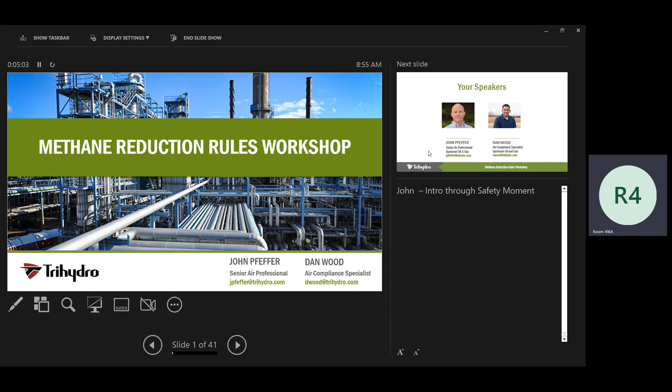Thanks. As Randy mentioned, my name's John Pfeffer. Long, extremely long bio; I usually abbreviate it. I've been primarily doing EH&S work in the downstream world for close to 30 years, but jumping into the upstream world the last half a decade and working with Trihydro, learning a bit from guys like Dan who spent a lot of time in the field. Dan's going to do most of the presenting today, and the experience Dan brings ties directly into what everybody's all excited about, which is new and upcoming regulatory changes. We're all collectively scratching our heads on a bit, but don't shoot the messenger. It's not his fault. That's right. So I'm going to give a little bit of a background.

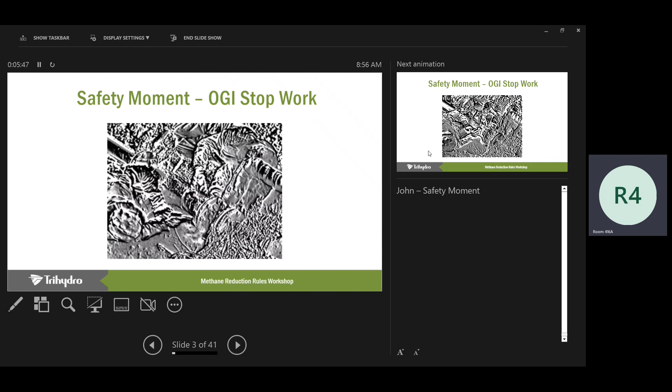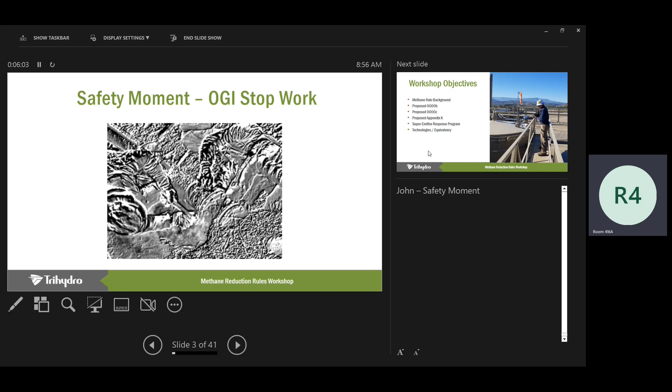We start with a safety moment. I forgot that. So I'd like to do a quick little safety moment. If any of you were in our presentation yesterday, you got to see this too. Dan actually shot this video, I believe, or it was one of our cohorts. How do I restart that? There we go. A couple of folks working down in the hole, making a flange repair, but getting a snoot full of gas. You can tell once the camera's turned on the scene. You don't always see exactly what those hidden hazards are. Good example.

Waiting for you if you're not paying attention, and a good example of a safety, health and safety aspect of an OGI camera. We were there to do fugitive or OGI camera surveys, but found a safety issue and called it to their attention and stopped the work. This was a good example of that.

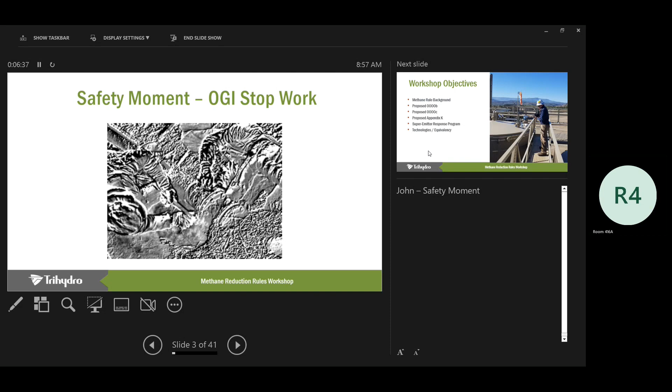The objectives for today: I mentioned we're going to talk about these new rules that have been proposed. I'll start with a little bit of background. I'll tee it up with a couple of slides on that, and then let Dan jump into the details of the new proposed regulations and where we think those may be going, and the things that we see as key points, but also questions that are still to be answered.

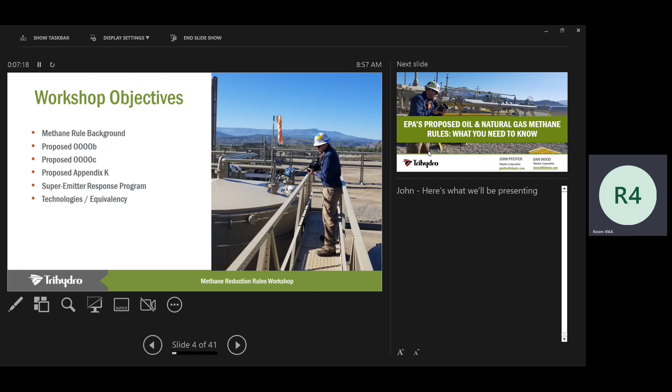I think there's still a little bit of work to be done with the final rulemaking, and we're, as with everybody, trying to determine the best course of action to understand what might be coming. Help our clients, but help the regulated industry understand what's awaiting us out there. Background on the rules. I was going to talk just briefly about the Quad O series. Of course, we rehash this a lot, but

the Quad O, we put the effective dates in here just for reference and thinking a little bit more about what might happen with the new proposed Quad OOOOb and what that effective date is. It's supposed to be a certain date, but whether it will be that date or not, there's some debate over that. Reminding us collectively too that Quad OOOOa was the first reg to bring the concept of methane into these rules. It carries forward in Quad OOOOb and Quad OOOOc, but

I guess the point we're trying to make on this effective date is, historically, traditionally under rulemaking, we would see what's referred to as an advance notice of proposed rulemaking, and that's what we effectively saw in the original publication, which was more of the concept phase in 2021, the collection of comments around the ideas that were posed at the time. So we saw rule language come out in 2022 for the first time.

Typically, you would have to have actually proposed rule language for that to become the effective date. The NSPS is based off of the publication date of the proposed rule, but typically relies on rule language. There was significant change in the rule language that was published in 2022 versus 2021. So the question is, will 11/15 of 2021 be the effective date for the majority of the rule?

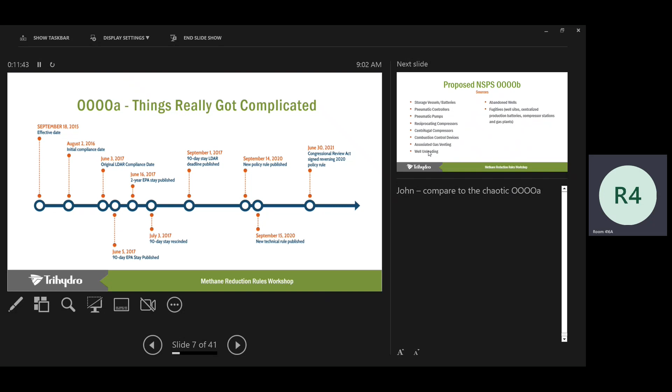Good question. Yeah, you bet. Quad OOOOc applies to existing infrastructure, kind of brownfield assets, to use that language. Quad OB applies to greenfield moving forward, if I got that right? Yeah. Let me back up and see if I've got it noted. The triggers for the NSPS is what we're talking about. So yes, that's exactly right.

If you use the term brownfield or existing, there's sources that have not been constructed in these date ranges or, since these date ranges were for the effective rule, modified or reconstructed. And those are defined in the regulation. So yes, you can have an existing facility that gets modified or reconstructed that will trigger the current rule in effect at that time.

So then you are thinking of Quad OB correctly, that coming forward, it will affect sources that are constructed, modified or reconstructed after this date today as proposed, but it might be a 2022 date. So not non-modified, not brownfield assets where nothing has changed. Yeah, correct. If you don't modify the source, Quad OC will bring those in. That's the concept. The intent is it's going to capture the existing sources that don't already have applicability because they were not constructed, modified, or reconstructed in this window.

Probably asset owners will want to apply a consistent high bar across. I think some people will for lots of reasons. Sometimes it's simplification. Sometimes it's just culture. They have a value. They want to bring things to as high a level as possible, or to be as compliant as possible, or to be reducing emissions as much as possible. Sorry for the diversion. No, that's good. That's what we want, actually.

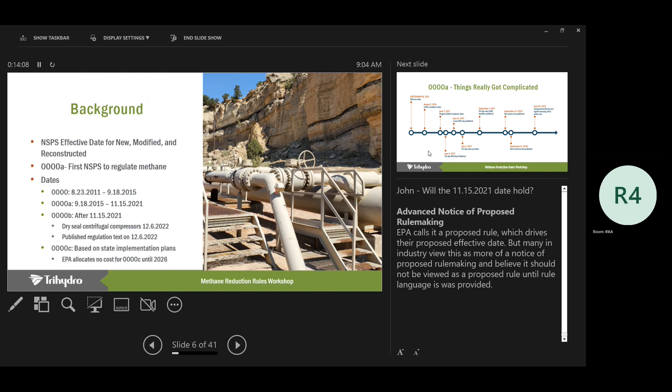Okay. So I'm going to show these are the proposed sources, and Dan, the next series of slides will speak to each of these in detail: what's in the rule and the things that we teased out that we wanted to point out associated with each of these. But this slide is really just for illustration of the different categories of sources that are affected by this rule. The next slide goes into it, so I'll pitch it to Dan Wood.

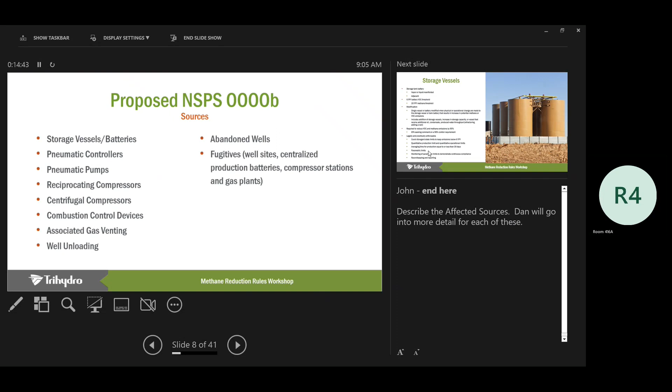All right, you guys ready for this? Like John said, we're going to go through each one of these source types. The first one I'm going to start off with is storage vessels. Historically, for those of you that have dealt with it, you've dealt with the 6 tons per year, right? So you could add storage vessels and end up finding ways of getting underneath the 6 tons per year. There's lots of ways, even through the state's legally and practically enforceable piece, that allow you to stay under the 6 tons per year.

No longer. With Quad OB, if they're vapor or liquid manifolded, or adjacent, you're talking about the 6 tons per year for the entire battery. So now you're aggregating all of your tanks. That's a big change, right? That's going to pull in pretty much every tank system that I'm familiar with. And we'll talk about it briefly, but one of the challenges there is going to be like dry gas.

You know, if you have a gas field and you just have a water tank out there, that's a challenge, right? Now, you very well could be technically over 6 tons per year for a single tank sitting out there, but not have enough combustible vapor to even combust, or to install even a VRU. A lot of times there's a lot of oxygen on those, so you can't install a VRU or even be able to combust your gas with some sort of combustor.

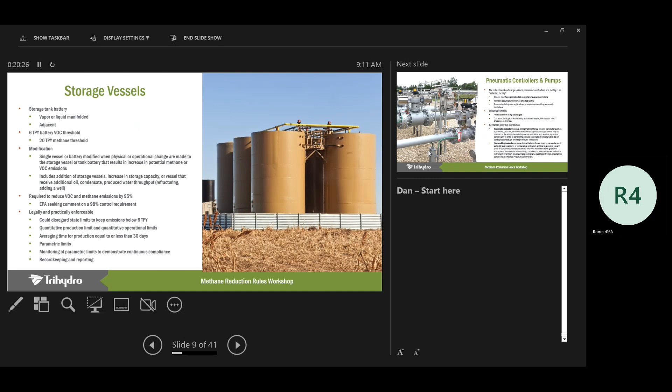For me, this is actually one of the ones that's really scary. This is one of those things that's going to be quite costly. Ultimately, we've seen this in a few places, Colorado and New Mexico. New Mexico is a precursor, but ultimately, all gas-driven pneumatic controllers are going to have zero emissions, so it requires zero emitting pneumatic controllers. So no gas venting. Where in a lot of places we're allowed to use low bleed under that 6 SCFH, we're no longer going to be able to do that anymore. They all have to be zero.

So what does that mean? Could it be instrument air? Sure. You route that gas back into the process? Sure. I saw Kimray came out with that. There are some retrofit kits that you can use, and it actually goes full loop on the pneumatic. There is some more technology out there. Those retrofit kits are only about $20. So those are for back pressure valves. For back pressure valves, which is questionable.

It is subject to debate, and that's part of the reason I included this. This NMAC, the New Mexico rule - there aren't very many good definitions of pneumatic out there for exactly what you're talking about. That's actually one of the best definitions I've seen. And there's also a non-emitting controller.

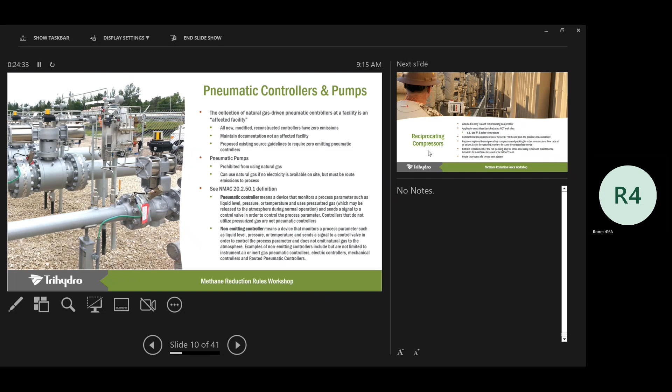Every 8,760 hours - so not dead on one year, but you have to do it within a year - and at or below 2 SCFM, so that's about 120 SCFH. In my experience, with the thousands of compressors I've measured, probably 40 or so percent of them are usually over that. That's a big deal, it really is a big deal. You can replace right back.

Ultimately, they're saying BSER is replacement of the packing or any other necessary repair and maintenance activity. Initially, in the first version we got, they essentially said replacement of packing, and now there's a little bit more leeway with other necessary repairs.

A key point here is there's a big difference between compressors - they don't talk about how many throws a compressor has. Is it a compressor with one throw or one with eight? Because I've seen both, but you're still going to be required to comply. It's multiple wellhead compressors versus these little ones - if it's just at the wellhead by itself at a small production site, you're good to go. If you get into centralized tank batteries, the larger facilities, compressor stations - that's where you get the full requirement.

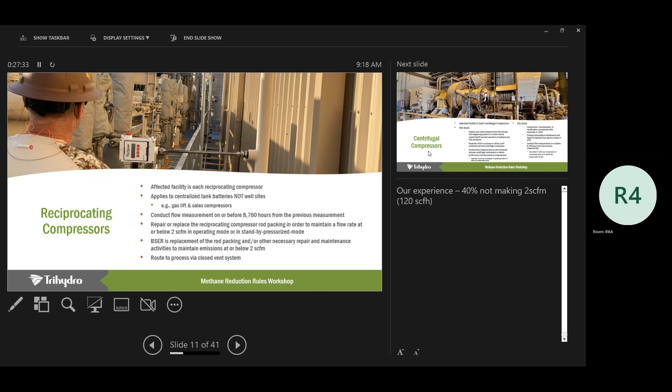Centrifugal compressors have very similar requirements. One thing that changed from the first version to now: they originally said it had to be a closed vent system under negative pressure that you routed it to. That's no longer the case - you can just route it to a closed vent system. So especially for smaller facilities and applications that don't have a negative pressure type flare system, you can actually still route it to a combustor and that will be okay.

A key note they added is it's got to be measured in operating mode, but they also allow for standby pressurized mode. Now, some of these turbines are either operating or they're depressurized when shut down, so sometimes the standby pressurized mode may not be an option, but you can use either mode. If one is under and the other's not, you might have a good idea of which one to use - it varies a lot. I've seen where the standby mode ends up being actually quite a bit worse than the operating mode. Once that oil heats up and all of that, it does a lot better job.

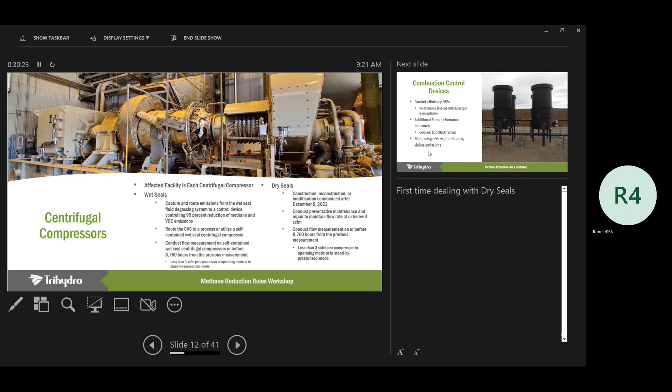Combustion control devices are very similar to what we were talking about before. Control efficiency at 95% - we initially commented on a 98% rate, but right now it is written as 95. Performance tests based on the manufacturer test are acceptable, and then there are some requirements potentially for additional flare performance measures.

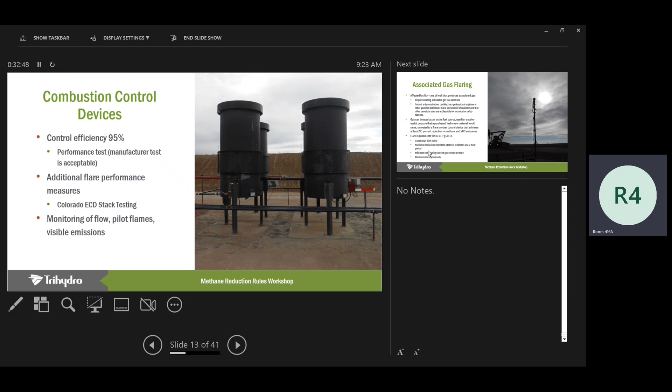Associated gas flaring - basically, you can't do it. That's really what it comes down to. It requires routing of all your associated gas to a sales line, or you submit a demonstration signed by a certified professional engineer - they do allow other qualified individuals - showing that a sales line is unavailable or that other beneficial uses are not feasible for technical or safety reasons. One of the ways I've seen some companies deal with this, in states that are restricting flaring...

Things like running generators out on site, mining Bitcoin - these types of things. It's kind of unique; I've been seeing a lot more of it as a way to essentially still use the gas, since they don't have a pipeline nearby or can't get the midstream operator willing to connect in. That's their way of trying to deal with it.

Now, not to pick on anyone - but like in the Front Range, where you're dealing with serious non-attainment status, now you're dealing with a scenario where you can't even do that, right? You put a generator on site, you're going to be dealing with a very different permit.

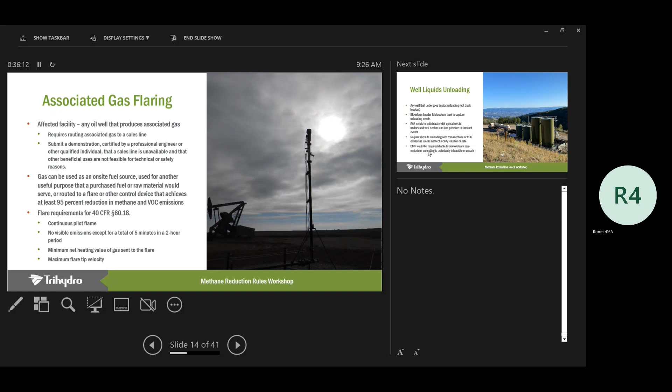Okay, well liquids unloading. For those of you that aren't familiar with well liquids unloading, it applies to gas wells here, and we're not talking truck loadouts. We're talking about when you get enough condensate and water downhole and gas actually slows down your gas production.

Essentially, in a lot of cases, operators would take that gas and route it straight into a tank system. Sometimes it's controlled, sometimes it's not. A lot of times it's just water - you're unloading water out of the well, and as soon as you get gas, you shut it off. It's usually very temporary, not a long-term thing.

But ultimately, you're not allowed to vent that gas. It has to be controlled - you might route it into a tank just to clear the liquids out, but a lot of these tank systems would just basically vent the gas. So that's not going to be allowed anymore.

Anybody in here deal with this? Yeah, we do it a lot. I guess I'm just kind of curious, but... So, I mean, we're talking like a remote single well gas well.

Highly loaded with water - I've seen basically a blow down header device on a trailer. The way they have it set up, there's one I saw that had a mobile flare on it, and another one you could actually hook in. It's an interesting thing because some of the liquids unloading situations are understandably different.

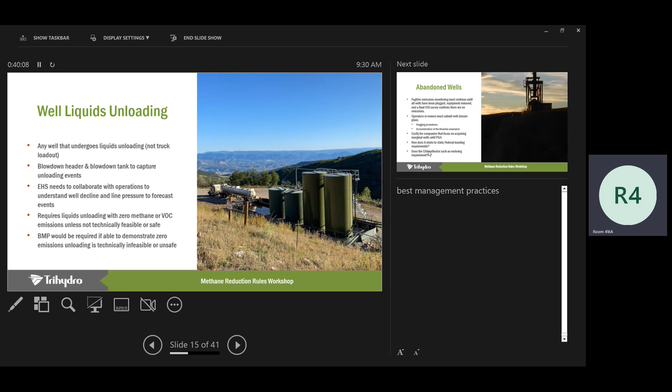All right, abandoned wells - this is another kind of contentious point. Ultimately, you're going to be required to do fugitive emissions monitoring until wells have been plugged, equipment removed, and a final OGI survey has been done.

So this is one of those things you have to have a plan in place for. As part of this as well, you have to submit well closure plans, including your plugging procedures, documentation of financial assurance, and some questions that I've ended up getting from companies.

It's going to be costly for some of these companies whose entire focus is marginal wells, talking about less than 10 barrels. This can be pretty cost prohibitive. How does that actually end up relating to existing state and federal bonding requirements? Getting into some of the BLM stuff as well, does the Clean Air Act even authorize a requirement like this that basically goes from the start when you drill the well to something that could be decades away, requiring a lot of guarantees as a company that you're going to take care of this.

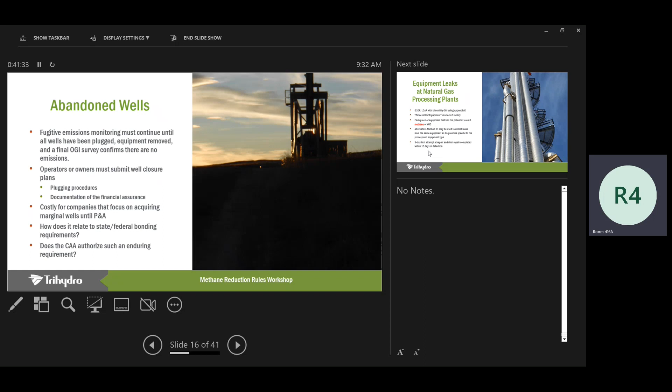All right, equipment leaks at natural gas processing plants. So we've got a couple of processing side topics.

Essentially, we're talking about Appendix K using OGI. Where it used to be that the BSER would have been Method 21 from previous programs, we're now talking about using a camera, but it has to be using Appendix K. Of course, process unit equipment is affected facility, so process unit boundaries, there's not really any difference there from what we've seen in the past. But the big difference here is methane.

So it's not just 10% VOC. As a matter of fact, I didn't see a reference in there to 10% VOC, but it just said VOC. So really any concentration of VOC or methane - it's pretty much everything in the plant. Now all of that equipment, like your fuel gas systems, regen gas systems, all your residue gas - you're talking about not just some smaller process type things, but really large process units that can qualify as process units that are now going to be pulled in.

You still can use Method 21, but keep in mind, when EPA addresses something as the BSER, their intent is that they really want you following whatever that is. So in this case, if you go from Quad O to Quad OB, you really should be using OGI.

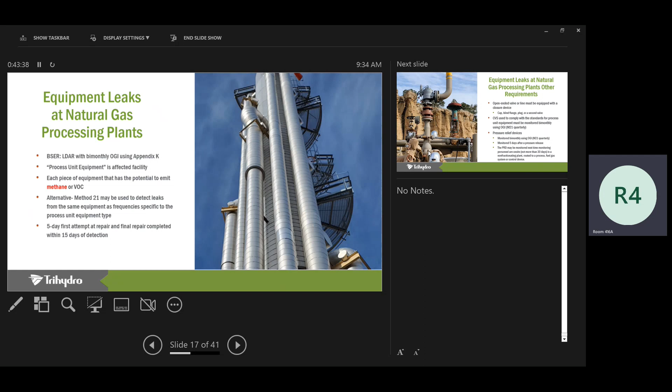For other requirements, a lot of us are used to the open-ended valve or line - you're required to have the cap, blind flange, plug, or second valve. That is a part of the rule. You can use closed vent systems to comply with some of the process.

Your closed vent systems are going to be required to be monitored bi-monthly using OGI, or Method 21 quarterly. So that is kind of an increase from our annual NPE type inspections. Pressure relief devices are also monitored bi-monthly, and they need to be monitored 5 days after a pressure release.

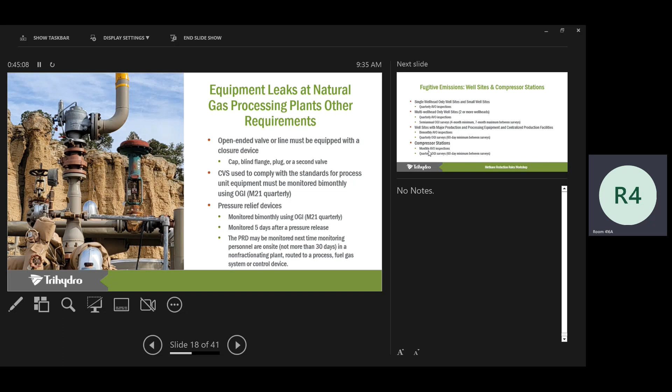One caveat that they added in, which as somebody that used to do a little bit of Method 21 I really like, is this: it can be monitored the next time monitoring personnel are on site within 30 days. In general, when we go back out and monitor a PSV after it's been repaired - once a company repairs it, it is extremely rare that we end up catching it leaking again. So from a cost standpoint, rather than having to send somebody out right away over a weekend or a holiday, you've got 30 days now. And chances are, if you have personnel out there monthly, they're going to make it out on site.

Getting into well sites and compressor stations - so single wellhead, there's basically 4 categories here. You have single wellhead only and small well sites. Small well sites basically can be a small wellhead, a tank, or basically one small piece of equipment. Those basically just require quarterly AVO inspections.

Once you get into multi-wellhead only sites, you have quarterly AVO, semi-annual OGI. So we're used to the 4-month minimum, 7-month maximum - it's no different here, so you have that 3-month time window survey done.

Then well sites with major production and processing equipment, and your central tank batteries - you're talking about bi-monthly AVO and quarterly OGI surveys. Similar to the compressor stations that we have now under Quad Oa that are quarterly, 60-day minimum - it's the same thing for well sites with processing equipment. You have tanks, treaters - you're now a well site with major production and processing equipment.

And then compressor stations, monthly AVOs and quarterly OGI surveys. So both well sites with major production - the larger well sites, tank batteries - and compressor stations will now be quarterly.

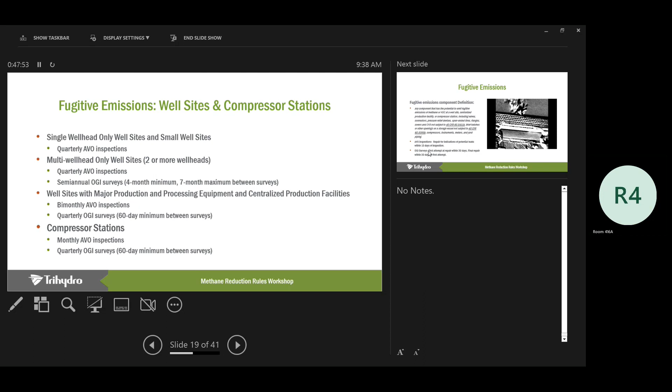Not going to read the definition, but there actually is another definition for fugitive emission component. Now, keep in mind that these hatches or other openings on a storage vessel, essentially, if it's a controlled storage vessel, it is a fugitive, including at gas plants. So where historically we haven't really had to deal with covers, hatch seals, some of those types of things, this is under the federal. Those are pulled in.

And then, of course, for compressor stations and well sites, for AVO inspections, if you find something, you have 15 days to make a repair. And for OGI surveys, you have the first attempt in 30 days and 30 days final repair.

So they do still allow for soap bubbles for verification. I know that's been a really big thing. Everybody can immediately confirm something's repaired. Obviously, in the case of like thief hatches, there are times that you can't use soap bubbles, so you need to be cognizant of that. I know in Quad OOOOa, they specifically called out not using soap bubbles for confirmation of leak repair, but it's just something to keep in mind.

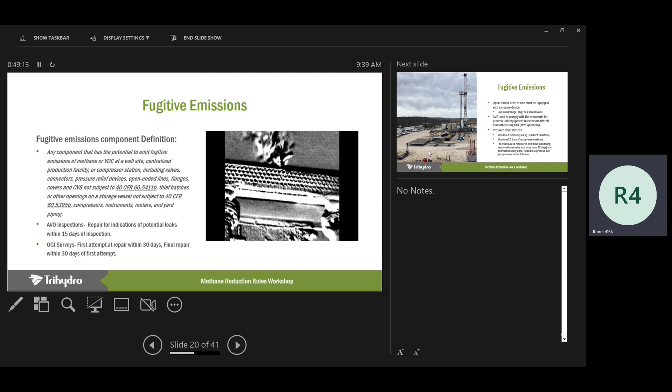Is it something where you can just simply go back, look at your records and find out somebody blew something down? Oh yeah, it was definitely that. Or is this a scenario where you need to send an OGI camera out on site, do an entire survey to confirm that there's no emissions out there? Right now, there's not really a whole lot of guidance there.

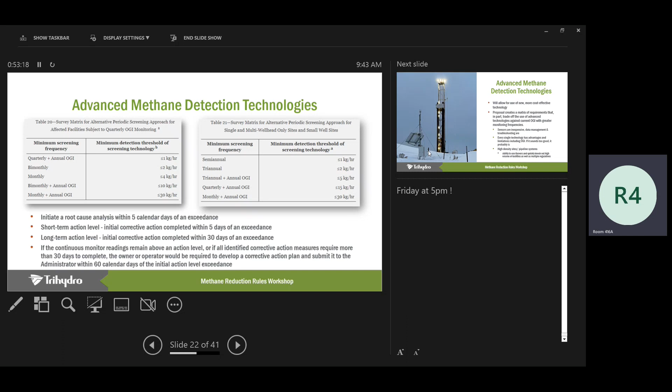But if you have to go back out with an OGI camera every time, now if you're out there monthly with an OGI camera anyway, why did you install a continuous system? So I'm hoping we can work through some of those things, but being able to use some of these technologies in an effective way, it is actually less costly. Better, because with an OGI camera, you watch the film. Right, exactly.

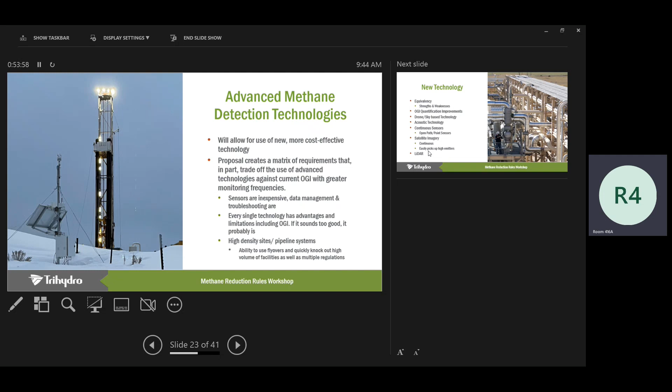So basically, this is just what I was talking about. It will allow for new, more cost-effective technologies. I'm thinking about things like the drones. When you start getting into high-density sites, pipeline systems, those types of things, that's really where that technology shines. If you've got well sites spread out by 20, 30, 50 miles, maybe not the best technology for you, but recognizing that every technology has options.

But let's be honest, if somebody tells you that their technology is the best and it has no weaknesses, they're probably lying to you. But make sure that you're matching the technology that you're looking at. And we're here partially for technology, right? We want to learn, we want to know about it, we want to see what's out there. And there's a lot out there now, from acoustics, OGI quantification, drone, satellite, continuous stuff, you name it. But understand what's your pain point, your goal?

What are you doing? I would add, if any one technology tells you it's a one-stop shop for everything you need, they're wrong. It's not an either-or, it's an and scenario, and it's for the asset owner to understand their objectives and then which combination of technologies can keep me compliant in the most efficient way. They're all just pieces in the puzzle.

And then of course, where does the data end up? Is that data going to be raw data files put out to the public, something that you're using internally, or just records to the agency? What does that look like? Because if somebody gets a hold of that data that doesn't know what they're looking at, what it actually means, sometimes it may not actually be a violation, a leak or something like that. It could be a permitted thing that's going on on site.

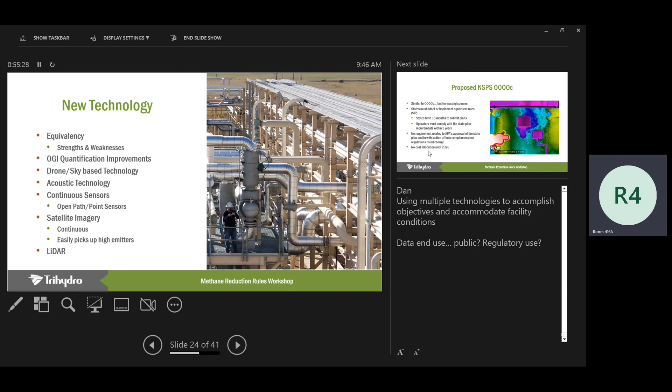And honestly, I'm not gonna spend a whole lot of time on Quad OC, because ultimately, until we actually see what the states are able to roll out, we don't exactly know. So right now, they're saying that it has to go through the state implementation plan process. EPA is giving states 18 months, and then operators must comply with the state plan once approved in 3 years.

I was actually talking with a gentleman from a state where they actually requested 3 years to develop their state implementation plan. It sounded like a few other states commented on that as well, just because it was kind of starting from scratch. Yeah. And also, industry just needs time, especially for existing sources, to even be able to deal with it. Our focus is trying to get EPA to allow for more flexibility on demonstration.

As Colorado, as you hear, it feels like our Reg 7 is like it, but better in a lot of ways, although it doesn't have all of it. So our struggle is with EPA on saying we don't have to demonstrate equivalent pneumatics to pneumatics and tanks to tanks. Like, our program as a whole is equivalent. Well, I know. I wish it were easier, but that's our approach. We think ours is better.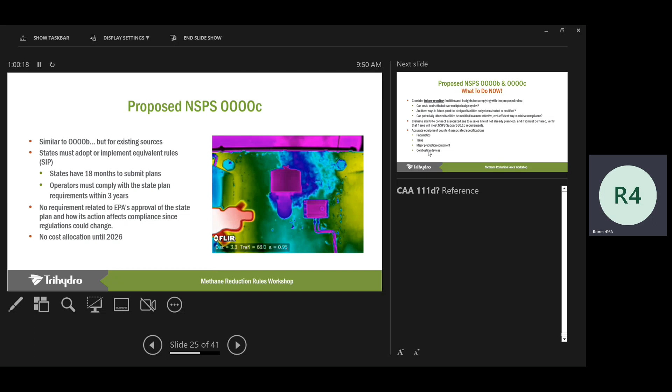There are a lot of different things being developed, especially on the pneumatic side, to deal with this instead of setting a generator with an air compressor at your site. On an association call, folks up in the Jonah Field dealing with ozone issues said for larger sites they'd love to set a gen set out there and run instrument air. Well, you're in a non-attainment area, so that's not really an option. You already deal with ozone action days where they try to prevent combustion. So beyond the rule, you might have to find even further alternatives.

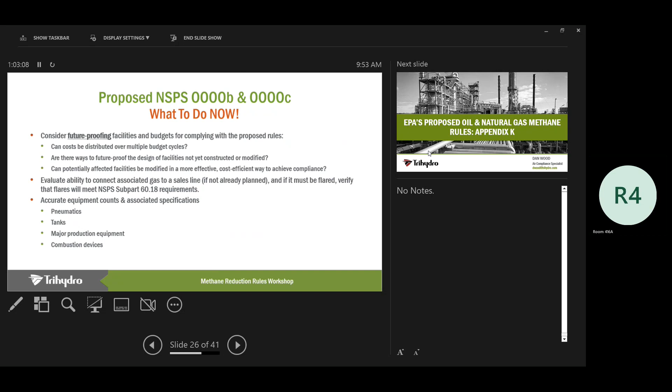How many of you guys have read the new version of Appendix K? I haven't since it changed. I remember last year at this time. Not a whole lot different, even with all the feedback they got. Not a whole lot different in that one of those meetings we talked about.

Of course, one change we got was it's not looking like it's going to apply to compressor stations. So generally safe from that side, because it was going to be a really difficult thing for that quantity of sites. Even talking to the state regulators that are going to be dealing with this, if you're doing a camera inspection, even from a regulator side, if you need to be Appendix K trained, all of a sudden that's going to be really difficult for everyone.

But one interesting spot that I really like to point out for those of you on the transmission compression side. You have a transmission compressor station, and the new Subpart W proposal references all of your OGI surveys being conducted pursuant to Appendix K. So everything you're doing at a gas plant, you'll also do OGI surveys at transmission compression stations. And so technically there actually is a weird overlap there, that you could be required to do an Appendix K based survey at a transmission compressor station, even though in general for Quad O and a lot of these other regulations it doesn't apply.

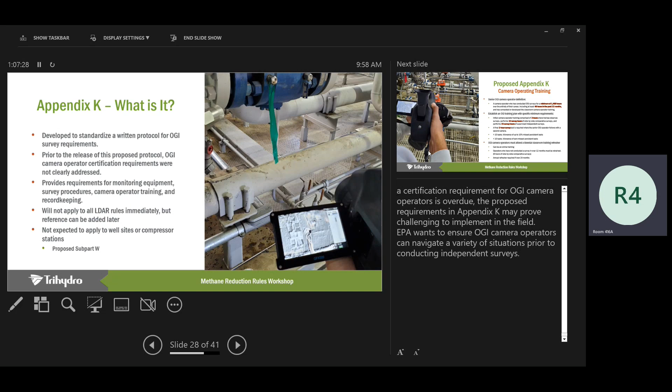So one of the big changes is under the camera operator training. Those of you that read the initial version, it was based on site surveys. And that was one of my biggest gripes, because there's a big difference between a well site and a gas plant or refinery. What is a site survey? They never even defined what a site survey is. So what does that mean? And so I was really happy to see that they switched to hours.

That being said, a senior OGI operator needs a minimum of 1,400 hours on the camera. And then you have to keep up every 12 months, making sure you have 40 hours. Shouldn't be too hard, but think about it, at least if you're having to do, and we'll get into the audits, if you're doing that stuff, you're kind of fulfilling that requirement just based on that.

But every single camera operator is going to need, I believe it ends up a total of 32 hours, if I remember correctly, where you have different pieces: the trainee observes, side-by-side comparative surveys with a senior OGI operator, and then 15 hours of supervised independent surveys. And then at the very end of it, there's this 2-hour survey test.

Something that they had in the first version was any persistent leaks: if you missed any, you had to redo part of the training and then take your test over again. Now they at least have this allowance, if you find greater than 10 leaks, that you can miss up to 10%. At some smaller facilities, sometimes you don't find 10 leaks, but at least there is a little bit of an allowance there.

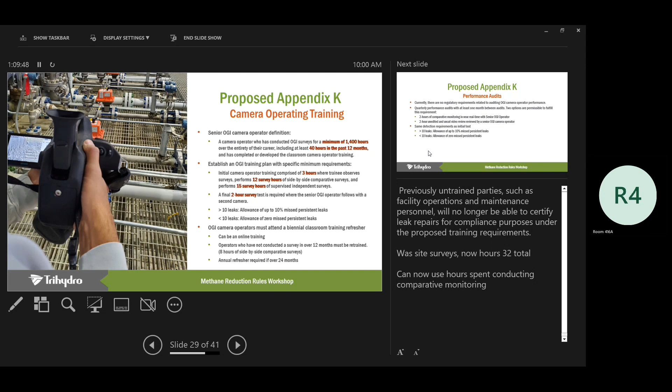Performance audits, essentially 2 hours comparative monitoring. This was 4 hours, so again a place where they made it less restrictive, but the concept is still there. So that can be real time with the senior OGI operator, or it can also be raw uncut video. You can actually submit 2 hours of raw uncut video.

I don't know if anybody here would qualify as a senior OGI operator. Quite frankly, I think the people you want out in the field doing these surveys are your senior OGI operators. They're the most qualified to find leaks and things in the field. I think we're going to see, as a result of these performance audits and requirements, that their entire focus is going to be training other people instead of actually being out in the field detecting leaks and doing what they really should be doing.

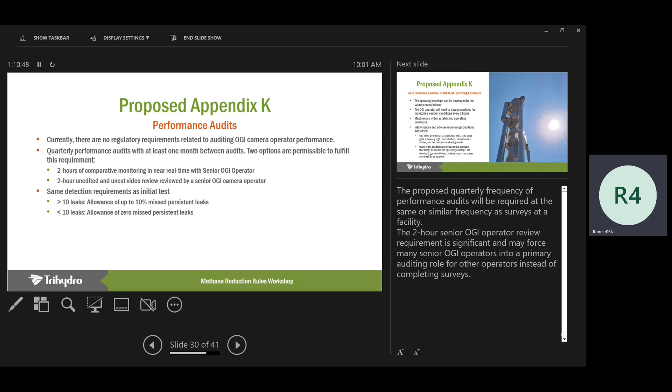Field conditions. One change they made here was they're actually going to allow the camera manufacturer to set the camera operating envelope, which was a big concern of mine. If you read through, there are a lot of requirements on how to set up this operating envelope and how you stay in it. At this point, at least one camera manufacturer, talking a little bit to FLIR, said their intention is to figure out independently what the camera can see based on wind, temperature, and even phase precipitation.

I think they're trying to wrap their heads around what it even looks like. But at least we can get to a point where you can go out on site and say it's 50 degrees, wind is 10 miles an hour, so I can see a distance of X, and use that instead of developing an envelope on site with 4 of your people. There's a lot of requirements there.

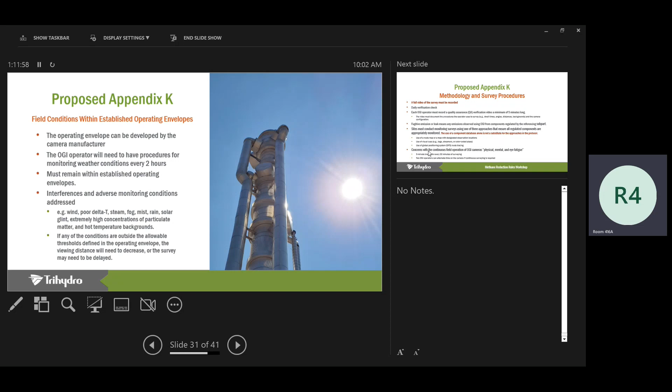Methodology and survey procedures. This is the piece that really scares me. Full video of the survey must be recorded. That's a change, that's a big change, that's an expensive change, that's a major data nightmare. I'm not even sure how we're going to keep up with the amount of video footage. We're talking terabytes of video footage per company, from our standpoint, where you're already required to do a QA video 5 minutes long, daily instrument checks. You've got all of these other videos you're already required to do, plus your entire survey video as well.

Another piece of this is the monitoring surveys. There are 3 approaches you can use. They specifically call out, for example, gas plants where you already have a component database in place, tagged all your equipment - it's not a substitute for any of these 3 approaches. So getting into use of a route map, designated observation locations, use of visual cues, or GPS route tracing. I thought it was kind of unique.

I'm curious to see what FLIR comes out with. I know the Champion X camera I saw out there actually has some really good GPS capability built into the camera - it's real accurate. The old FLIR cameras and the Opgal camera I've seen, the GPS can be off by a quarter sometimes and all over the place. So it's going to be really hard to demonstrate that you're covering everything you're supposed to.

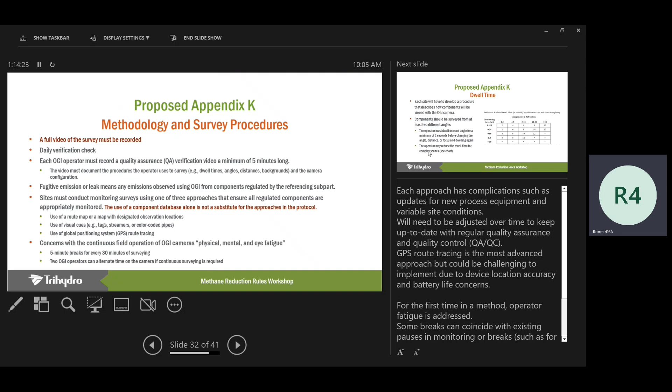Well timed - EPA did release this chart. It actually looks a little bit different; the numbers are slightly less than what they were, but similar cross sections. In general, they require every single component to be monitored for 2 seconds at two angles.

So this is one of those things I'd be curious if anybody has any feedback here. As somebody that does get out in the field sometimes and use the camera, how in the world do you pick an area? So maintain distance, measure cross, you're guessing, right? How do you prove that cross section is the area that you're talking about here?

Not only that, count the number of components to know that you're doing it correctly. I'm not sure how you even use this table necessarily in a way that you can effectively always tell somebody I comply with this table. Because if you've got 8 components but you were 0.125 square meters, doing that continuously over the course of the day, I really don't know how you do that. How are they gonna audit it?

I think that's good, it's gonna be hard to audit, but some of the full videos of the surveys, they might be able to see some of it. As we went through Appendix K, it became apparent to our team that some of this is written by people who never even... definitely.

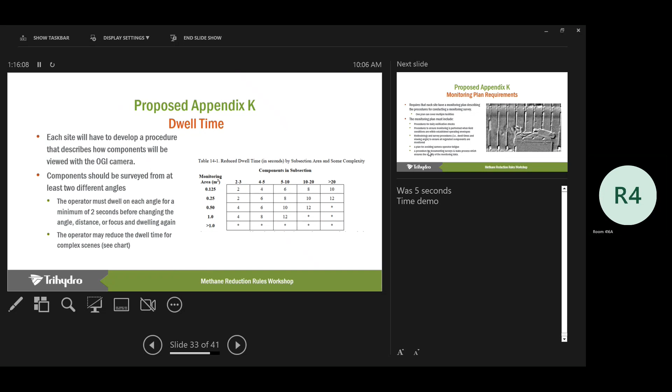Monitoring plan requirements. This is very similar to what we saw in Quad Oa. One note is one plan can cover multiple facilities. So something that I always like to recommend, if you have a lot of similar facilities, create a plan. Don't change it, and have an appendix that you update as new facilities get added. Then you can have site-specific information in that, because the core of what you're doing doesn't really change. Your procedures for conducting monitoring survey don't change. If there's something small for a specific facility, you can put that in the appendix, and that's fine, but at least the core of your monitoring plan is consistent.

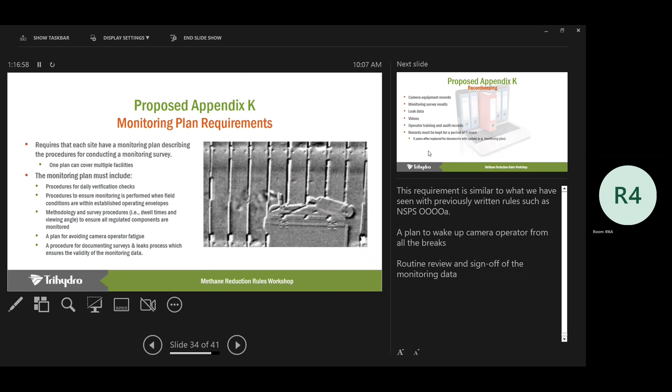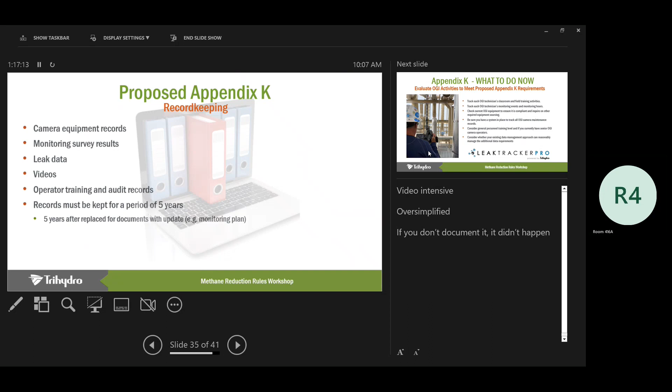So what can you do now? Ultimately, tracking what every single OGI operator's classroom and field training activities, what have they done in the past? EPA actually specifically calls out now that you can use previous experience. That was one of those things that everybody commented on. Nobody's going to technically be a senior OGI operator if you start here. How do you even start? How do you train anybody? And so, just based on that, now we have to go back in time.

When I first started, all my records were on paper, and I didn't have a database or anything like that. It's going to be a little bit difficult for me to come up with how many hours I actually spent on the camera. I've got papers here and there. As we started using our LeakTracker Pro system, we can pull that information now, but that's going to be something that you need to look at. And is everybody trained?

Tracking all OGI camera maintenance records, that's another thing that is required as a part of Appendix K. They want to have all your calibration records, everything that you have, and that's got to go back 5 years. So technically speaking, if you start using Appendix K on day one, you need to have 5 years worth of records for that camera, all of the calibration and maintenance records that you've had over that 5 years.

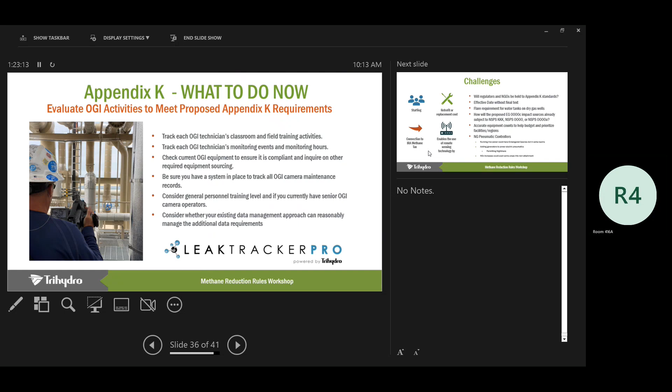I think I really went through most of this already. Have to touch on it.

That's a big number. That has to be some sort of major process issue, or I could see that being something like an unlit or open hatch, those types of things. But is that going to be a leak?

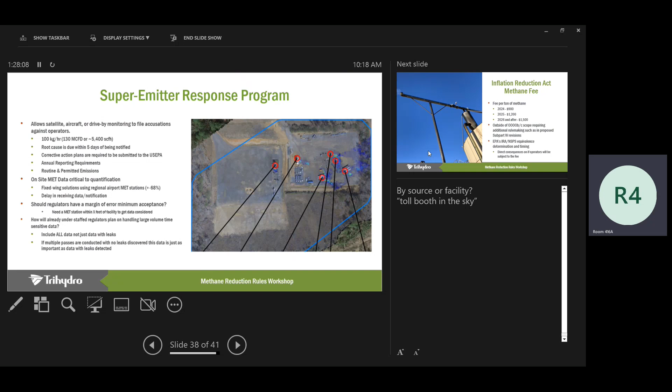Yeah, so this is part of the Quad B, Quad C. Once that gets published, this is my last slide that I'd like to scare everybody with.

Mostly just to draw some awareness - recognizing that as part of a lot of this IRA, you're going to be charged a fee per ton of methane. There's a lot of stuff out there right now that we don't really know. One key point here is that it's outside the Quad B or C rulemaking.

Could it maybe be Subpart W? I've heard some rumors there. Who's going to be responsible for it? Is it going to be the states? Is it going to be the IRS? Nobody really knows right now.

But the key thing to note here is if you comply with Quad B, C right now - if you can show equivalence or better reduction, and the EPA authorizes it, they have to make a determination on that Quad B, C, per basin or per site. Per site, I'm pretty sure, is the one - I'm going to have a whole hearing on that.

So can you just exclude that site from your methane emissions? The way they have it set up, yes. Even if you might have 300 sites in the basin, you can just cut those out. Those don't count on the Quad C side. And if you're talking existing sites and you pull in everything, now you can end up being exempt from the methane fee if EPA does that equivalency piece.

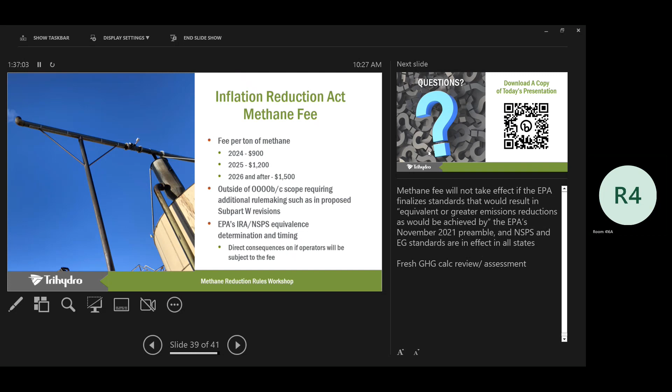I appreciate it. I'm Robin. Yeah, Stephanie and I are here. Oh, no, I appreciate it. I love it. I read the proposal and Colorado's comments in the initial, but I haven't. Thank you all. See you around. Thanks, guys. You bet. I know. If it stays warm like this, the after lunch presentations are going to be brutal. Uh-huh.